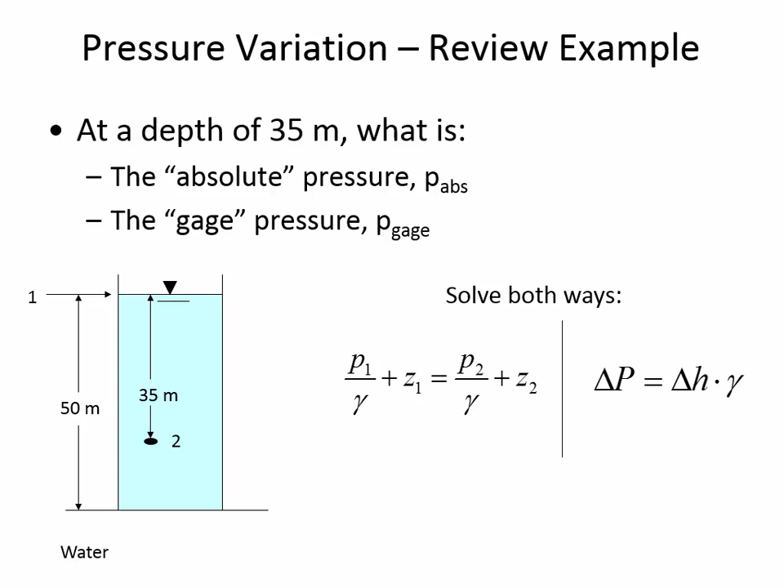So what I'd like you to do is assume this tank of water has location 1 at the surface, where the gauge pressure is 0. We'd like to know the pressure at location 2, which is 35 meters under the surface. Just to refresh your memory, solve for this both ways: substituting actual values for P1, Z1, P2, Z2, solving for P2; and then the abbreviated approach using a delta H.

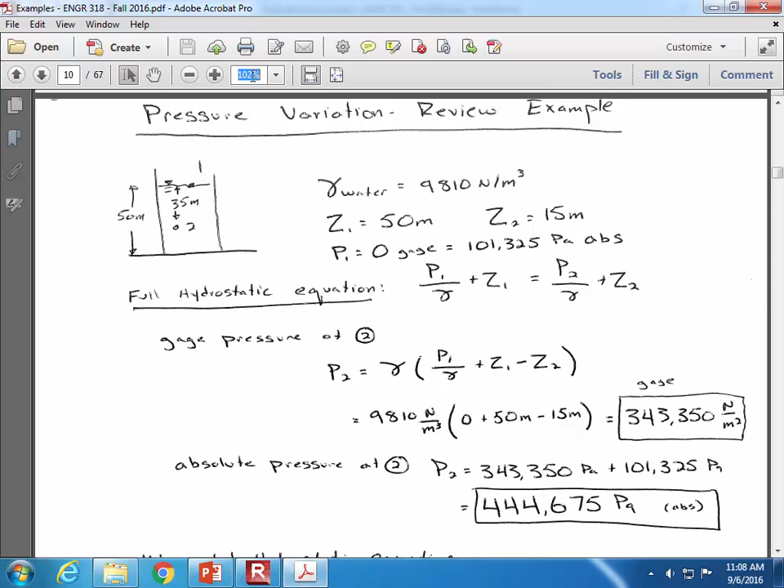Right, so what do we know? We know the unit weight of the water - if no temperature is specified, we'll use 9810 newtons per meter cubed. We've got the Z values from the drawing. The pressure at 1 is 0 gauge, or 101,325, which is the absolute pressure of atmospheric. So I asked you to solve this both ways, first with the hydrostatic equation.

If you rearrange the hydrostatic equation to isolate the unknown P2, this is what we get. We're multiplying the unit weight by the difference in elevation, assuming that the pressure at 1 is 0, since that's gauge pressure. So that tells us the gauge pressure at 2 is 343,350 newtons per meter squared.

And then if we want to know the absolute pressure there, we just add on atmospheric on top of it. So it's the difference in measuring basis for the two - absolute versus gauge.

This is just an example of the easiest possible question I can conceive of for a quiz. I'm not saying the quiz will be this easy, but it certainly won't be easier.

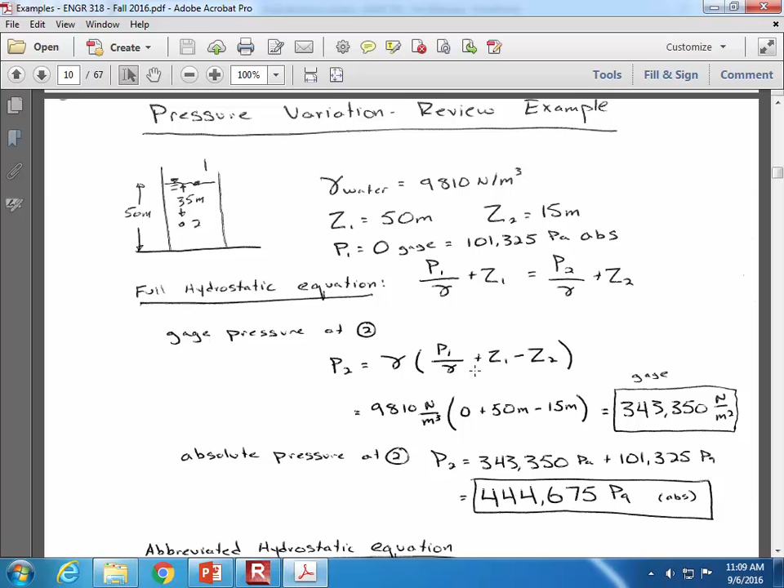The abbreviated hydrostatic equation, we're just using the delta P, and so we say at the top of the tank the pressure is 0, and as we go down through the liquid the pressure is increasing. For every meter the pressure goes up 9810 pascals. So we multiply the depth by the unit weight, and we see the pressure increase is that same 343, 350, and then for absolute pressure you're adding atmospheric on top of it. So we get the same answer either way.

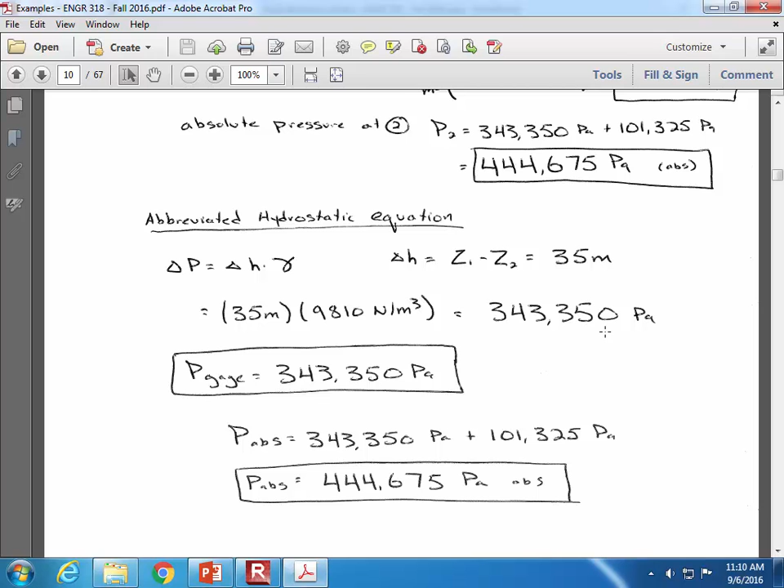All right, any questions about this illustration? Review?

One of the principles we know about pressure is that it's additive, and pressure continues to increase regardless of how many different fluids you have. So in this example we have a layer of oil and a layer of water, and we know the specific gravity of the oil is 0.75.

Now I've already kind of given it away by the colors in this drawing that the oil's on top, but even if you didn't know it from the colors, it's sort of like an oily color. Just the fact that the specific gravity is 0.75 would tell you that it's floating on top of the water. So here's the water, here's the oil, we have SG is 0.75, and how can we use that SG? What does that enable us to calculate?

The oil gravity over water gravity. Okay, good. So the definition of specific gravity would be the unit weight of oil divided by the unit weight of water. And if we know that ratio, and if we also know the unit weight of water, which luckily we do because we memorized it, then we can find the unit weight of the oil, which we will use anytime we're doing hydrostatic calculations.

I'll keep harping on the fact that it really is helpful for you to do a sketch, even if you're looking at one right in front of you. Something about doing the drawing yourself makes the problem more clear.

You'll notice I labeled the locations where there's an interface between a gas and a liquid, which is location 1. Location 2 is the water-oil interface, and 3 is the interface of the water and the container. It's the vertical distance only that determines the pressure change, so they don't have to be right on top of each other like 1, 2, 3. I could have had number 3 labeled over here off to the side, and it doesn't affect the pressure at all. It's only vertical distance through a fluid that accumulates pressure, not side-to-side distance.

So we're asking the pressure at the bottom of the tank, and even if you don't know how to solve a problem, anytime you're given the specific gravity of a fluid, you should automatically say, probably I should use that specific gravity to find out what's the unit weight or density of the fluid. Just getting the preliminaries out of the way and preparing the information you'll need for the rest of the problem. So that's the first thing I've done here, calculated the unit weight of the oil based on the specific gravity that was given.

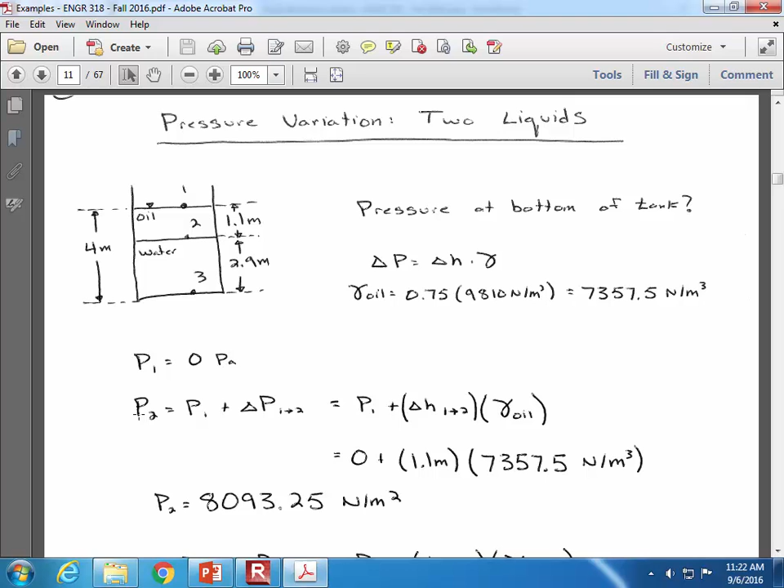So in this case, we're first going from 1, where we know the pressure is 0, towards 2. The pressure at 2 is going to be whatever the pressure at 1 was plus the change, and it's plus because we are going downward through the fluid. The pressure at 1 was 0, and then we have 1.1 meters of pressure as a result of going down through that oil, so we multiply by the unit weight to find the pressure at 2. Now the pressure at 3 is whatever the pressure at 2 was plus the change, and again positive because we're going downward through the fluid. This time there's a different unit weight since we're using water between the two interfaces, multiplying it by the different height, which is 2.9 meters.

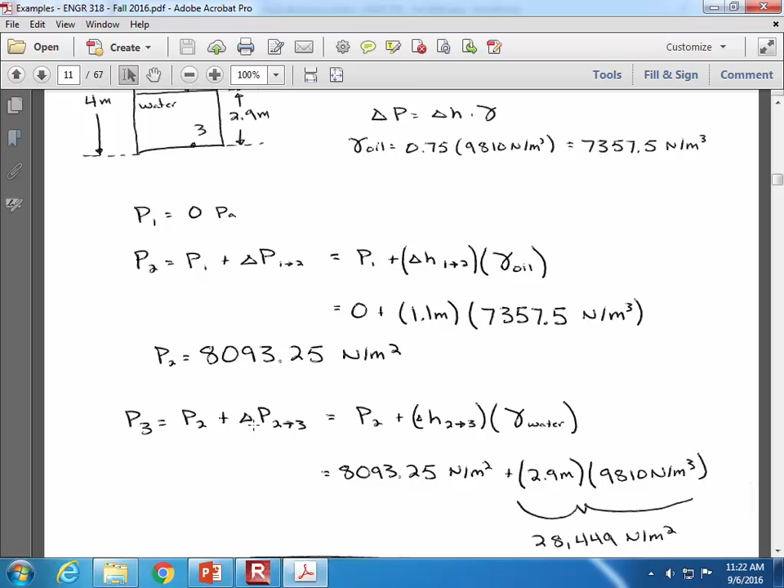Don't let the tricky dimension, the way the dimensions are described, throw you off. It says it's 4 meters tall from the bottom of the tank to the top of the oil, and then they tell you 1.1 meters is the oil length, so obviously you have to subtract 1.1 from 4 to find the thickness of the water layer. Sometimes in your homework problems it'll be the same kind of thing, where they're being maybe a little bit obscure about the way a drawing is dimensioned or the way the givens are supplied.

Any questions from this example? Okay.

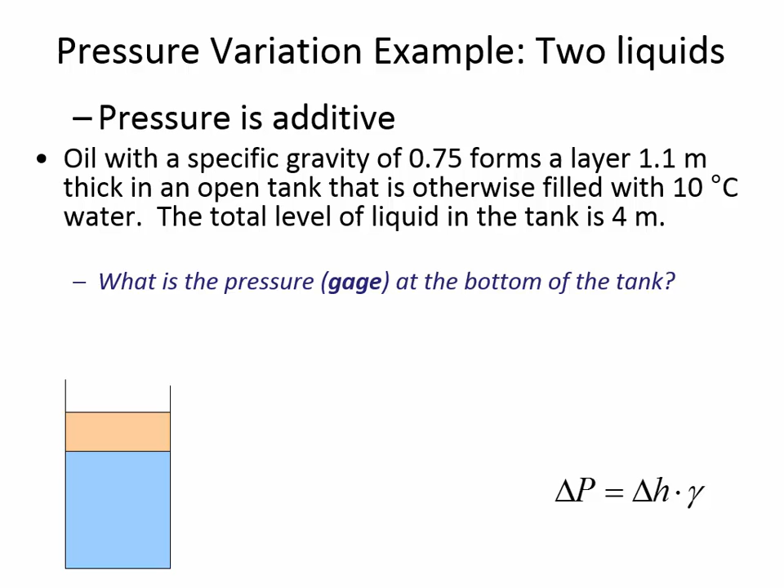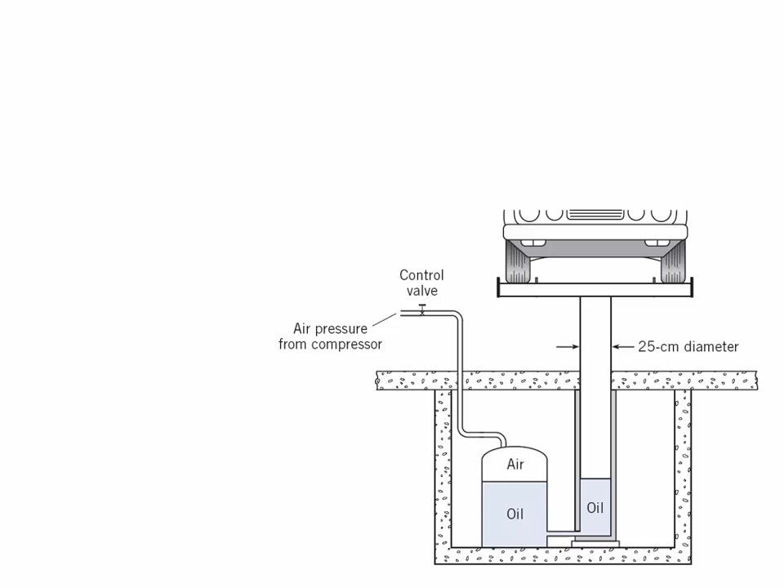You can see in the drawing that you have a diameter of 25 centimeters. So from that you can find the cross-sectional area, the area of that cylinder. In a situation like this, it's a way of transmitting pressure from some off-site location to where you want it applied, and it can help you find the force lifting up the car. It's going to be in equilibrium—if it's not rising or falling, then the lifting force is equal to the weight of the car.

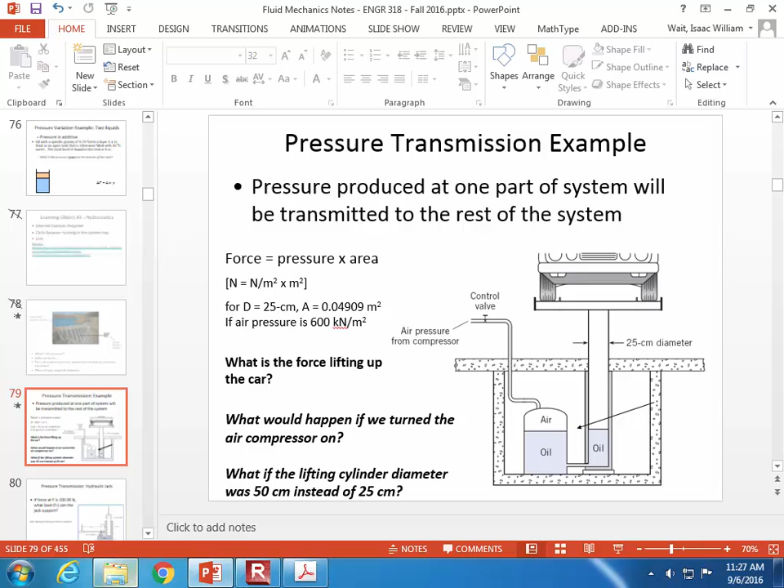In this example, we have a diameter of 25 centimeters, and from that we can calculate the area, because area is pi d squared divided by 4. Applying that formula, we find the area—the bottom area of that cylinder. And if the air pressure is 600 kilonewtons per meter squared, we can find out how much it is lifting up the car. Here's a little sketch that illustrates that.

We've got the air pressure down, which means the hydraulic pressure is up. It's pushing on that cylinder with a force of about 29,000 newtons. That works out to about 3,000 kilograms if we divide 29,454 newtons by 9.81 meters per second squared, because remember, weight is mg, so mass is weight divided by g.

All right, so this illustrates how you can use pressure transmission in a useful way. But let me ask you this: what if we increased the pressure? Right now it's at 600 kilopascals. What would you expect to happen to the car if we turned on the compressor and started adding more pressure?

All right, so if we turn on the compressor, the force will increase because the pressure increased. We said force is pressure times area, so if you increase the pressure, it's going to increase the force, and it would lift up the car if you turn on the compressor. It's going to raise the car.

It's not going to raise it forever—it's going to come into a new equilibrium, a little bit higher than before. That difference in elevation, how much higher it is, is related to how much additional pressure we put in. If we go from 600 kilopascals to 605 kilopascals, it'll have some increased delta H related to the delta P. We can use the hydrostatic equation to tell us how much higher it will rise as a function of the unit weight of the oil.

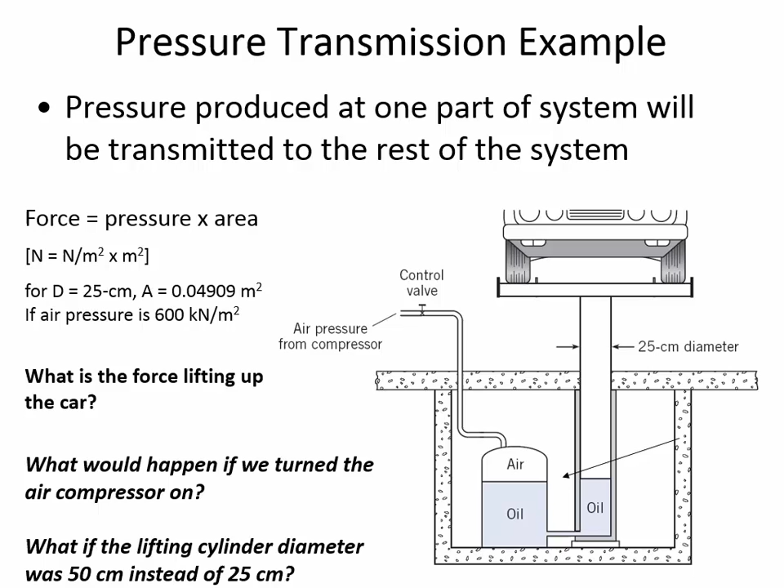And we're going to see that in this next example, where we have a hydraulic jack, like you maybe would use at your house to lift up a car when you're changing the tire or working on the brakes or something. Now this has mechanical advantage in 2 different ways.

Okay, so if we push down with 100 newtons on the left of that handle, in order for this to be in equilibrium, there has to be a force up at B with a magnitude of 1100 newtons, just because of the distances and so on. So if it's pushing up on that handle with 1100 newtons, that means it's also pushing down on that plunger at A1 with the same force.

And then we can find out, if you're using that force over a relatively small area, because it's just 1.5 centimeters, then that's going to pressurize the liquid inside of the reservoir. So a force divided by the area will tell us the pressure of the hydraulic fluid.

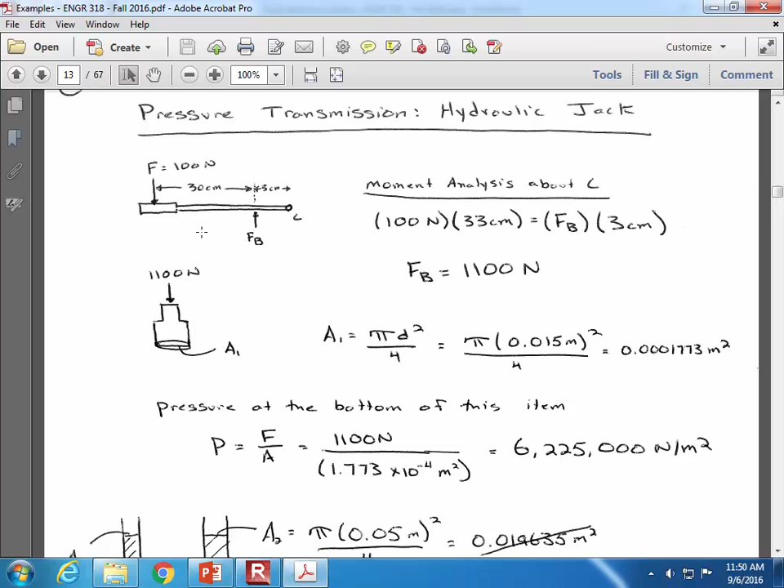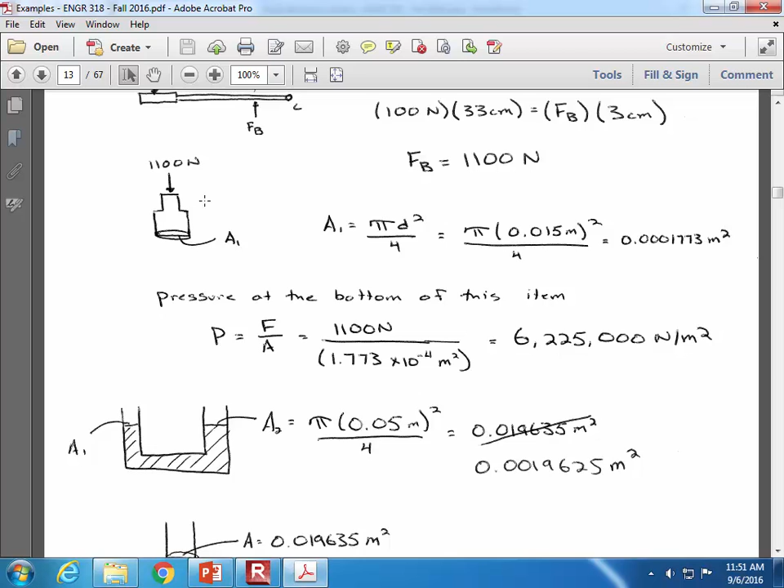The pressure at A1, the pressure of the liquid at A1, is the same as the pressure over at this other spot because they're about the same elevation. So then we have to calculate the area at 2 and multiply that area by the pressure of the liquid, and that'll tell us the lifting force, how much the jack can lift.

All right, so what are some other ways, if we needed to lift more than that? What could you do if you needed to lift more than 12,000 newtons?

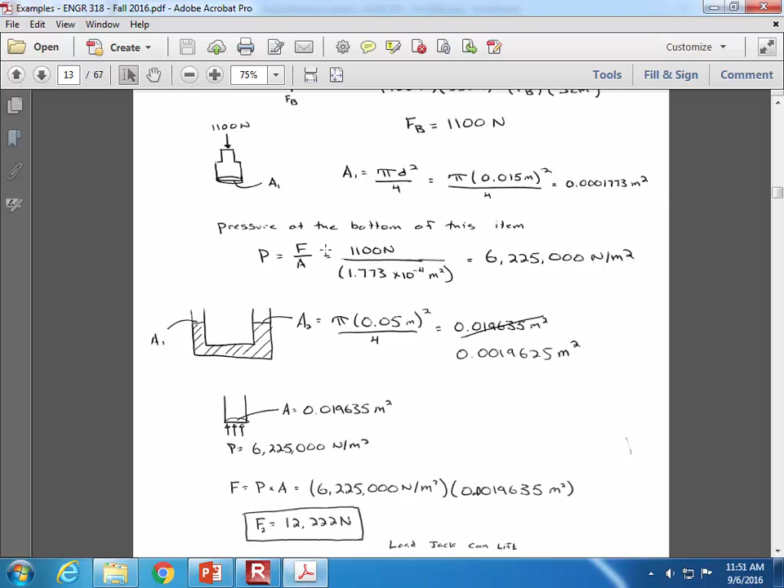Decrease the diameter on the left and increase it on the right. Yeah, changing the ratio, that's one of the force multipliers there. Yeah, make the handle longer, right? So that'd be another way of doing it. Or moving this one closer to C would be another way of increasing the force. Or pushing harder, I guess, is another way to lift more.

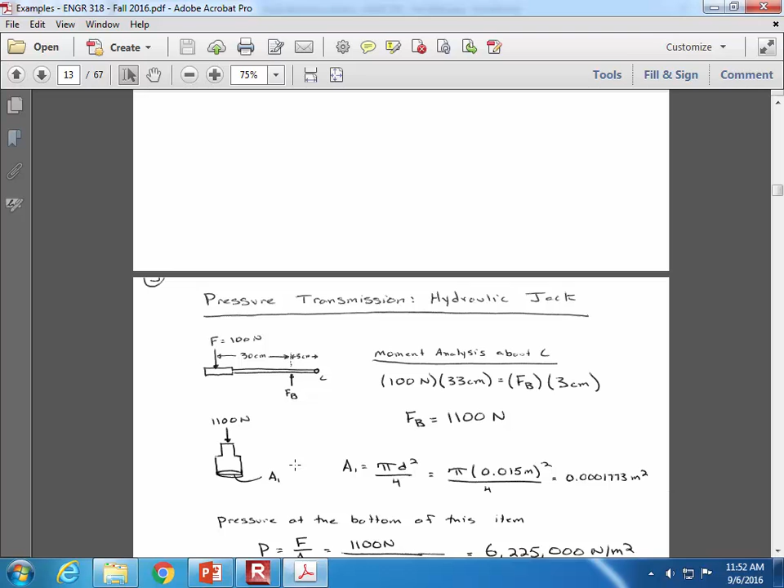Good question. He asked, what about increasing the column height? Right now, it looks like these are about the same elevation. So if you just made the column longer, what you're doing really is adding to the weight of the system. We've kind of neglected the weight by saying it's in equilibrium without any force, and then we're going to apply some additional force here on the handle, and that's why we can lift it too.

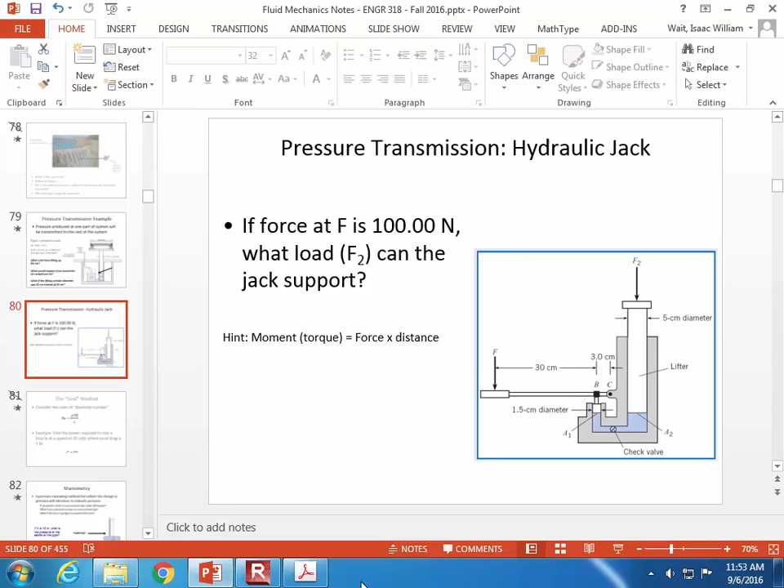But the more we push, we're going to elevate this slightly, and so the hydrostatic equation would say that the pressures aren't exactly equal if you're lifting this up. If there's a deflection there, the pressure was so high, this 6 megapascals in the solution, 6,225,000 pascals, even if there was an elevation difference of a couple of centimeters, it's not going to have a very big decrease in the pressure.

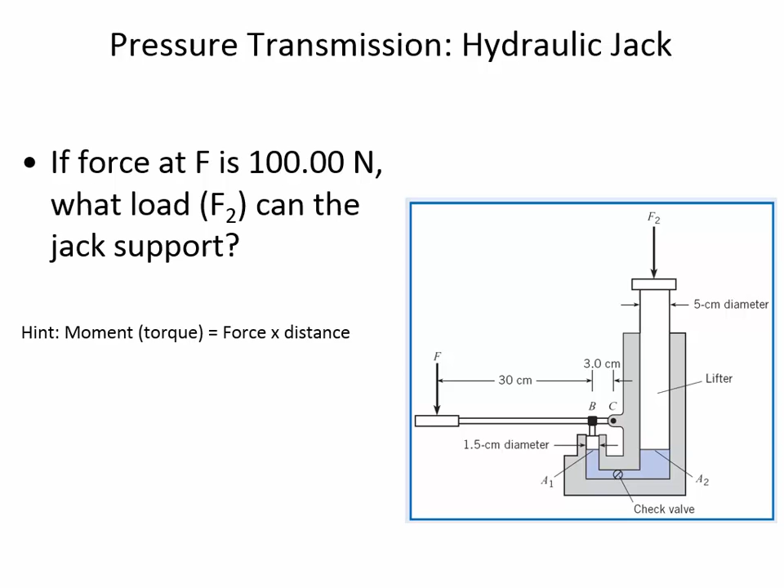But just changing the physical height of this column isn't going to increase our ability to lift heavier things. But I'm glad you asked about that because so far in both of the examples we've worked, we've had the liquid levels being equal. But we can handle the fact that if the cylinder was up here, then we need to find the pressure there that's caused by how hard we're pushing on the jack, and then we need to know the pressure someplace else. We just apply the hydrostatic equation: it's the pressure there minus some change as a result of it being elevated above it. So we just apply delta P equals delta H times gamma.

All right. So the way that we can measure pressure has evolved a lot in the last few hundred years. The oldest way that pressure was measured was with a device called a piezometer. And manometry in general is just a way to describe efforts to measure pressure.

Let's say, for example, that we have a water line going underneath the road, and we do. So envision that this is the water line that goes under the road. Now I've told you before that a typical ballpark pressure of a water line is about 500 kilopascals, 500 kPa. That's the same as 500,000 newtons per meter squared. If we puncture that pipe running under the road, water's going to be spraying everywhere.

But if we puncture it and then connect a tube that just goes upward, the water is going to rise up in that tube until it gets to a certain height, h, that corresponds to how much pressure is inside of the pipe. So in the case of approximately 500,000 newtons per meter squared, we divide that by 9810 newtons per meter cubed, which is the unit weight of water, and we're going to get roughly about 50 meters, 50 plus meters.

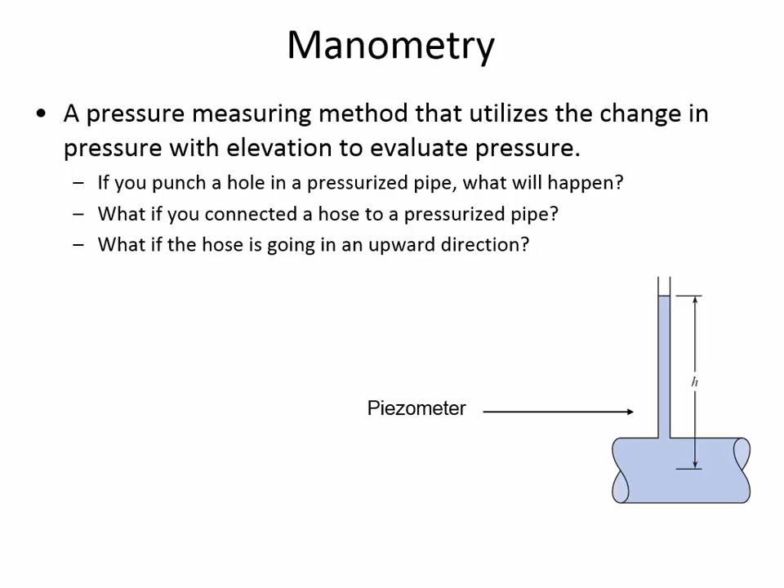But with the rest of our class time today, we're going to take a look at 3 of the problems that are on this really large, lengthy homework assignment you've got due a week from today. I want to ease you into this by defining some of the terminology that might cause a little bit of confusion otherwise.

All right, on problem 3.15, I've abbreviated what the problem statement says. It says, as pictured, the air pressure in this enclosed section is 50 kPa vacuum, and because of that vacuum, water rises to H. As you can see, the water's getting sucked up into that tube.

So what do you make of this 50 kPa vacuum? Pressure is a negative gauge pressure. So if we're saying gauge is 0, then anytime we have less than 0, that's either negative gauge pressure or vacuum. We know that, according to the problem statement, atmospheric pressure is 100 kPa. So in the first case pictured, the air pressure inside of this enclosed space is 100 minus 50, so it's going to be 50 kPa inside of there.

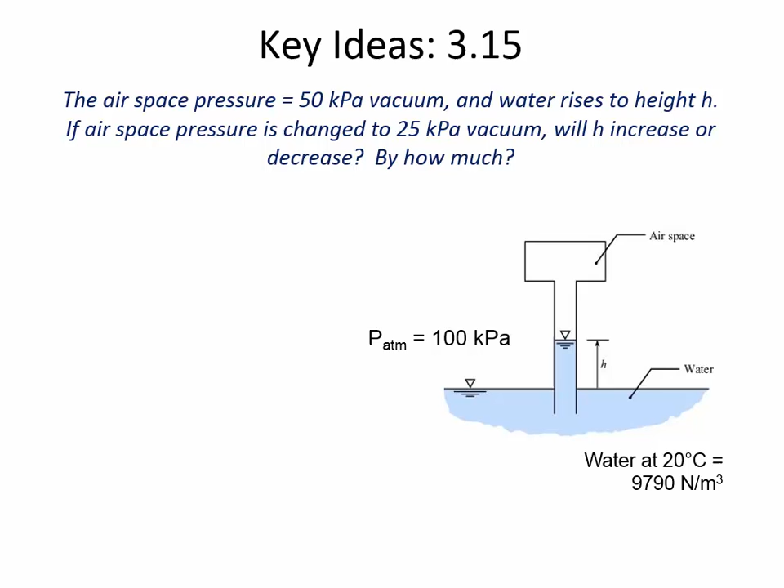And so here, the suction is decreasing, the vacuum's going from a vacuum of 50 to a vacuum of 25. So H is going to decrease, but they want to know by how much. So you have to find out what is H before, what is H after, and then find the difference between the two, because that is the decrease that the problem is asking for.

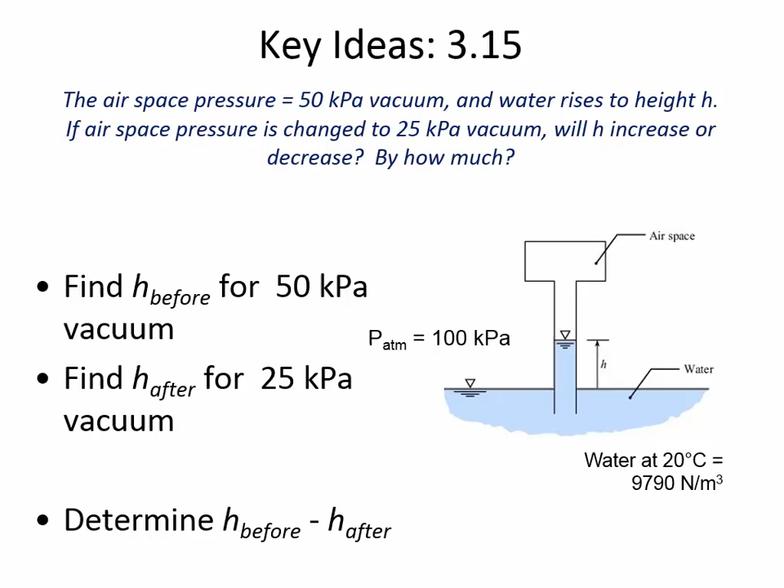All right, so are there any questions related to these key hints here? A vacuum needs to be subtracted from the atmosphere - that's right. Other questions?

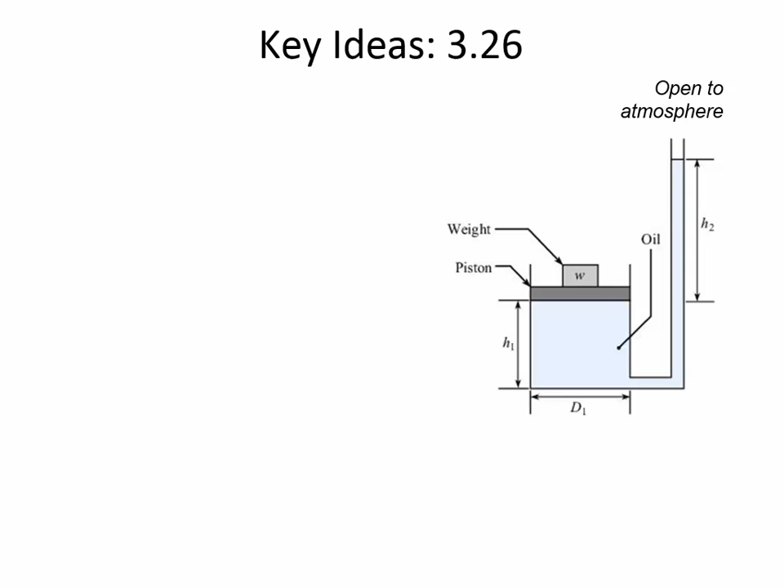...or in this problem, they're telling you the mass of that load. So from the mass, you can find the force by multiplying by G. And then if you know the force acting over a certain area, then that tells you the pressure of the liquid. And so you've got the piston diameter, and pressure is force divided by area - you can find the pressure of the oil there.

So what it works out to be is that from the stuff you know on the left, you're going to have some known pressure at the interface of the piston and the oil. And that will be the same pressure as over here on the right side. So you'll have a pressure known at the bottom of that H2 distance. You know the pressure at the top of the H2, and so you'll find the magnitude of H2 just by applying the hydrostatic equation.

So in other words, just to summarize, delta P will be known, the unit weight is known because of the oil's specific gravity, and you'll be solving for delta H, which is the H2 that they want to know there.

What about H1? How do you use that? You could, if you want to use the full version of the hydrostatic equation instead of the abbreviated, you could use that - let's say the bottom of the container is your Z datum. So if you wanted to do that, you could. But actually, H1 is not needed - it's irrelevant information because you could solve it just based on the abbreviated hydrostatic equation.